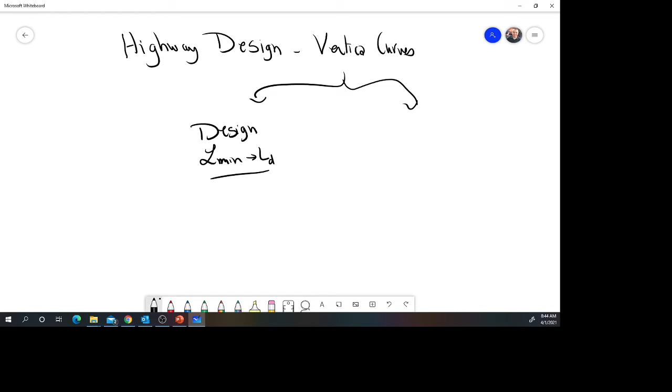We talked first about horizontal curves, and today we're going to talk about vertical curves. Vertical curves have two components: the design, where we figure out your L minimum and your L design, which is based on your L minimum, where you approximate or upgrade your L minimum to become your L design. And the second part is the surveying part, where you want to set up locations or stations of your vertical curve.

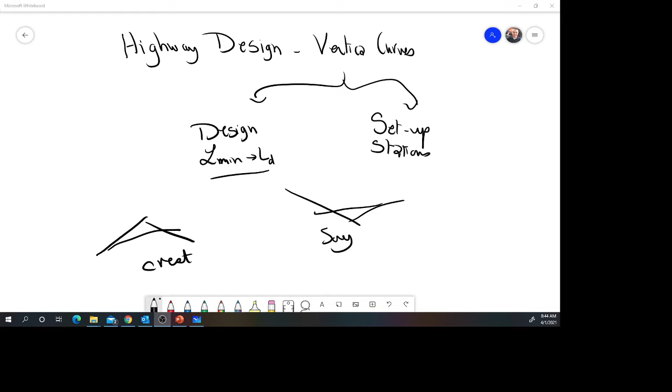We defined two types of curves: crest curves or sag curves. We have also defined two cases for each of these designs. We started with crest curves, and we defined two sets of equations based on some assumptions where we design our crest curves. Let me remind you of that. For the crest curve, you have one of two cases, and you're going to assume one of them.

The first one is when you have a big curve. Sight distance is one main issue for this kind of curve, because the pavement always hides something behind. So when the sight distance is smaller than the length of the curve, in other words, this is what you can see, and this is the length of the curve. We always start by assuming that you have a big curve, in other words, L is greater than S.

In this case, the equation is: L minimum equals A S squared divided by 200 times (square root of h1 plus square root of h2) squared. Let's define these values. S here is the sight distance, and we're going to make an assumption that your SSD, which you calculate from your stopping sight distance equation, is equal to S.

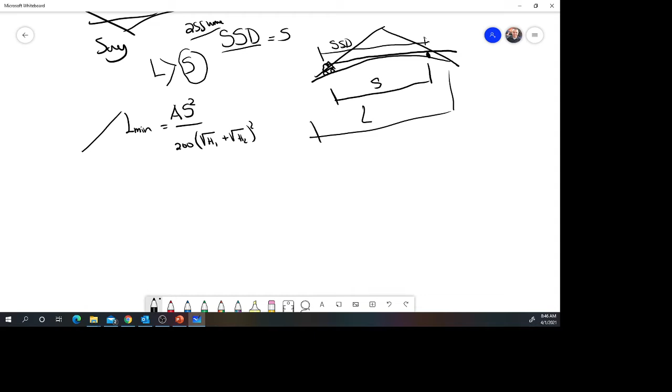What do you mean by this assumption? The distance you can see is going to be equal to the distance where you can stop. Again, stopping here is two distances, when you react and when you hit the brakes. So we assume this is what you can see for a safe design. That's S. A here is the absolute difference between the two grades: G1 is the first tangent, G2 is the second tangent, and A is G2 minus G1.

Guys, in most textbooks, when you see this G in uppercase, or when you see in the equation some big number with hundreds in it, two zeros, just know that this equation took into account that we don't care about the percentage. So for 6%, you just take 6. G1 here is 6, and this one is 4, and so on. So put the number as a whole number, not a percentage.

What are H1 and H2? H1 is the height of the driver's eye, where he can see at night the headlight of the car ahead of him, and that's the critical case. It's assumed to be 3.5 feet, critical for a small car where the driver's eye is really low. H2 is the height of the headlight or backlight of the car ahead of you, assumed as 2 feet.

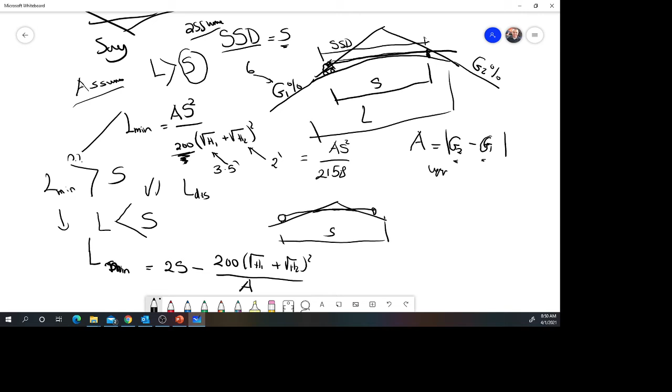And you go ahead and go to the second set of equations here, and the L minimum equals 2S minus, again, the 200, again, the H1 under the square root, H2 under the square root, squared, divided by A. So you see, it's just the same values, but it's just set up differently. And again, if you use the defaults of 3.5 and 2, it's going to be equal to 2S minus 2158 divided by A.

If this assumption went wrong, then you're going to find once you compare it that always L will be smaller than S in this case. And now you were able to design. One other thing you have to note is that always the PVI, which is the point of intersection here, is going to be in the middle of the length of the curve. So that's the length of the curve.

So you subtract L over 2, add L over 2 to find your 2 points here, PVC and PVT. Again, same here, your PVI is always in the middle. And you go ahead and you subtract L over 2 to find your PVC, and you add L over 2 to find the PVT. Now let's just jump into my presentation, and I apologize for my really bad handwriting, and let's go and set out for sag curves. Sag curves is a little bit different, and let's see what happens in sag curves.

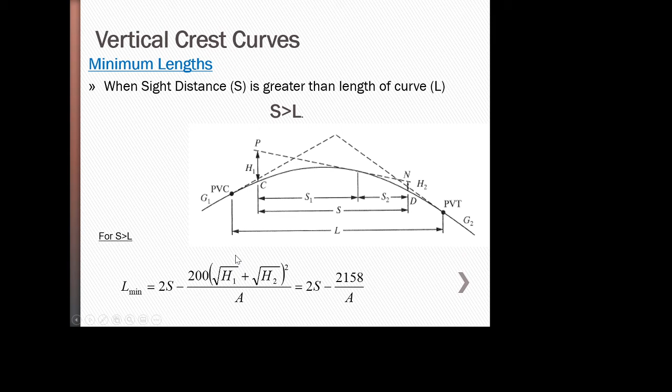So these are the equations for the crest curves, and we're going to solve questions in a separate video, or we'll do numerical examples. Before we go to sag curves, AASHTO always tries to help us with tables and charts that will take care of this set of equations. And this is for a specific case here for a big curve. You remember the big curve when AASHTO defaults were used, and we came here with AS squared divided by 2158. What they did is that they stick this constant here, S squared divided by 2158, which is dependent only on the stopping sight distance or the speed.

And it's multiplied by A. A is different from one curve to another, so if you know G1 and G2, you calculate A, and then you can get this K from AASHTO. We have here a table from AASHTO, it's table 3-72 in the AASHTO manual. We have two types, metric or US customary.

All you have to do is figure out what's your design speed, and directly using again the AASHTO default, it's going to calculate the stopping sight distance. And then you have here the value of K. We have two Ks, and you notice here we rounded up to get the design K. So K here is, again, S squared divided by 2158, depending on this value here. And all you have to do is get your K multiplied by A, and again L.

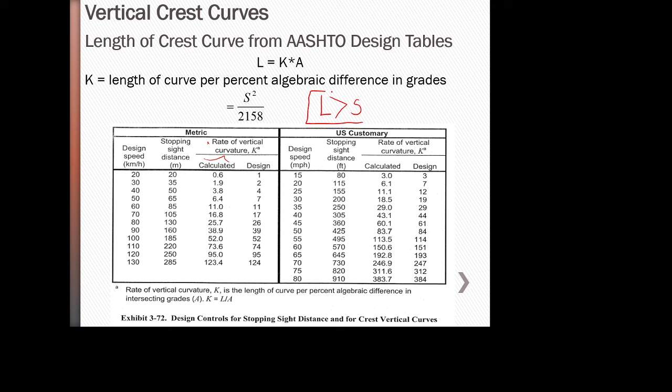But one test you always have to do is that once you get your K, you want to make sure, based on the G1 and G2 that you have, that L is greater than S, a big curve. If this is not the case, then you have to go to the other assumption.

Now let's move, guys, to sag curves. Sag curves have a different criteria. What do you mean by different criteria? First of all, when you drive in the morning, sag curves are amazing. Why? Because you can see from one side to another, except for one specific case when you have a bridge above. This is where truck drivers have issues seeing the other side. So what about sag curves? The sight distance is the problem. The problem is the following.

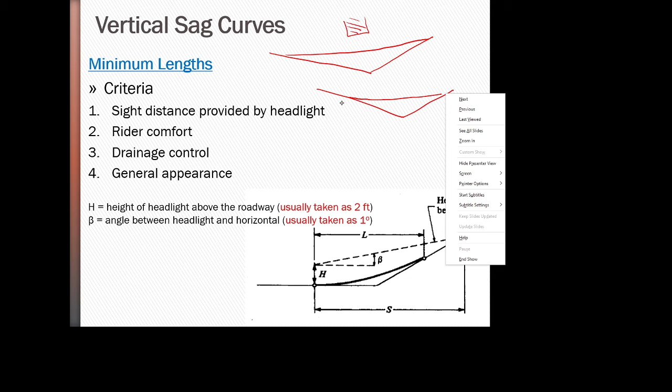When you drive at night, and let's not talk about backlights now, we're talking about a deer hiding in the dark. I have here a deer hiding in the dark. And what makes you see the deer is your headlights. So what happens here is that you have a car, you're driving, this is the height of your headlights, and this is the angle of your headlights, and this is where you suddenly can see the tree or the deer hiding in the dark. And that's the only critical case of your sight distance.

So again, the sight distance is provided by the headlight. So let me go down here. So the sight distance you can see here is defined by number 1, h, which is the height of your headlights.

And number 2, what you can see here on the pavement is your object that you have to stop for once you see it, a deer, for example. And the beta, which is an angle, is how your headlights go up. So again, it depends on your low headlight. It's about 1 degree above. So this is what you can see. It's based on what your headlights can show you.

So AASHTO gives us again some kind of default: 2 feet, which again, when you have any lights above the pavement, it's going to be 2 feet. And this beta angle is 1 degree. It's a very, very small angle because you don't want to hit the eyes of the car coming in front of you.

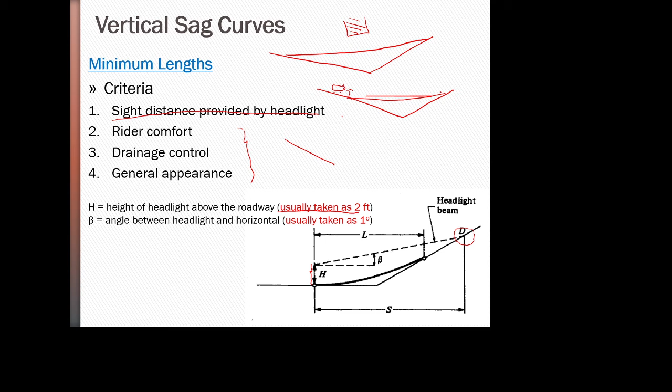But for the sag curve, since sight distance is not that critical, not only sight distance provided by headlight is the critical one. We have the 3 things we discussed when we talked about vertical curves in general. Sag curves can be very bumpy. If they are very, very small, it's going to be a bumpy ride. You want it to be big. So comfort is one important thing.

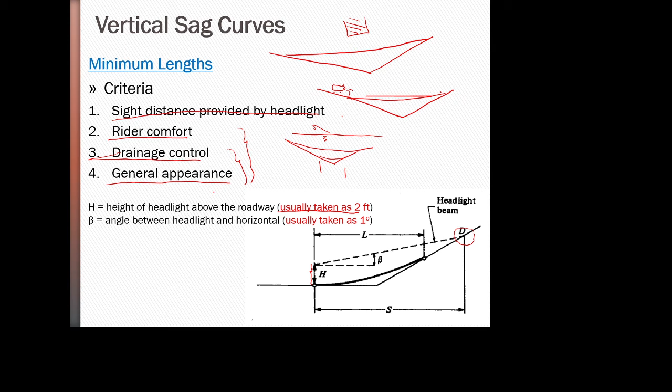Another thing, you don't want your sag curve to turn into a swimming pool. So drainage is another important issue here. Finally, general appearance and how it looks is another important thing. These 2 are put into one equation when we figure out the values of length of curve, the criteria that decide the length of the curve.

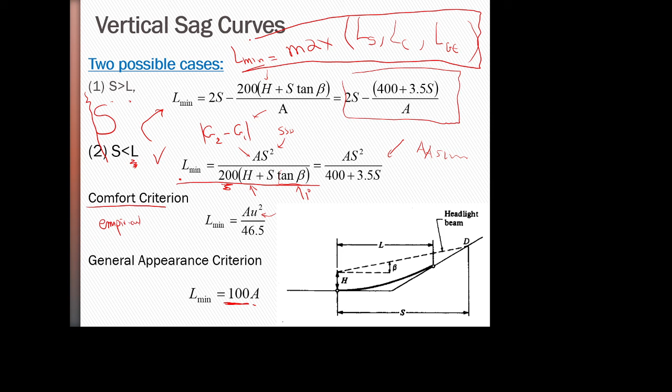Finally, general appearance, another empirical value, that's very easy, just 100 times A, and it gives you L. It actually works not only for general appearance, but also for drainage. So you have now three values of L, and you take the maximum of the three. That will be my L minimum, the minimum length of curve serving these three criteria.

We're going to do another example in a separate video, another example for crest curves.